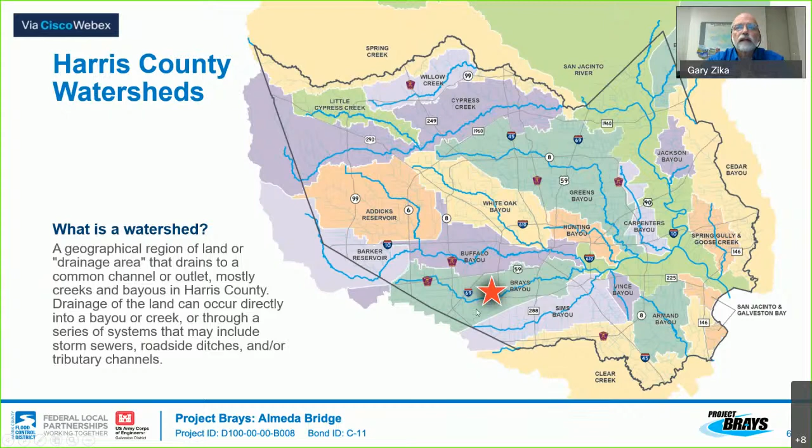Our area is prone to flooding. Here are the three main reasons: the area is prone to extreme rainfalls from tropical storms and hurricanes, we're flat with slow draining landscapes, and we have clay soils that do not soak up excess rainwater quickly.

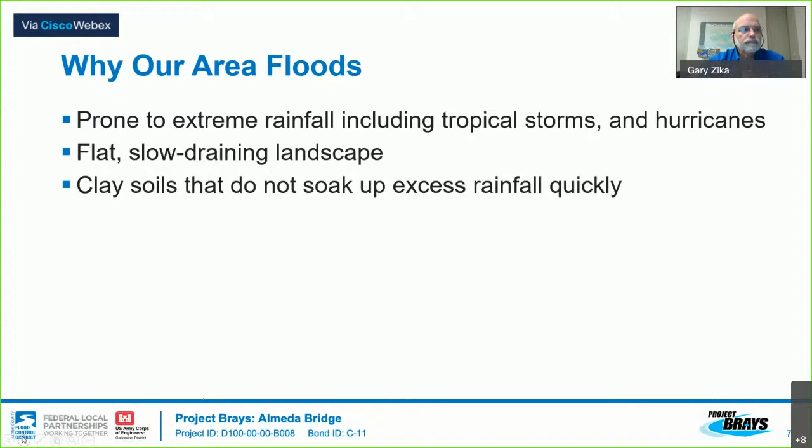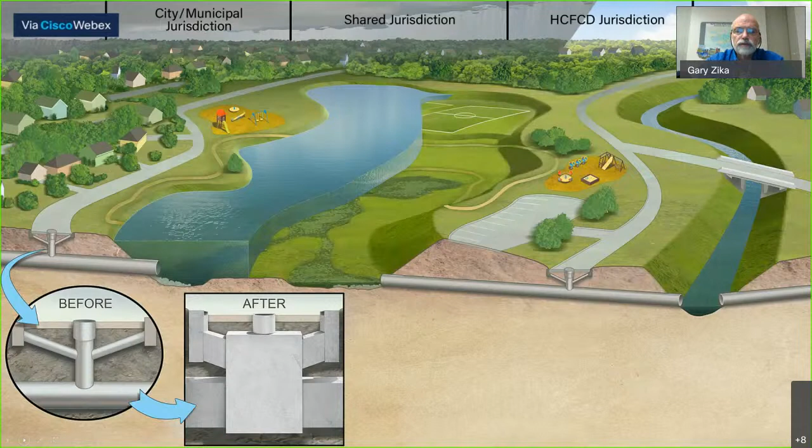On August 25th, 2018, Harris County voters approved $2.5 billion in bonds for flood risk reduction projects. This vote followed a series of meetings across Harris County in each watershed, which resulted in a list of what is now 181 bond projects. 149 of these 181 projects have been initiated so far.

A total of more than $680 million in partnership funding has been secured to stretch the 2018 bond program even further. The actual timing of each individual project will depend on a variety of factors, including environmental permitting, right-of-way acquisition, utility relocation, and in some cases, the requirements of a particular grant. That said, project lists and project schedules are updated regularly on our website.

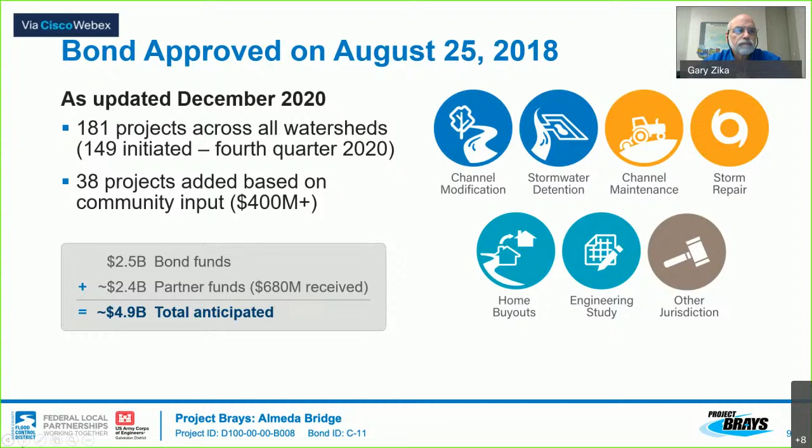We'll now move to the part of the program that's specifically about Brays Bayou Watershed and the Almeda Bridge project.

The Brays watershed is one of the most highly urbanized watersheds in Harris County. It covers more than 128 square miles and has a population exceeding 700,000 people. It's 31 miles long, making it one of the longest bayous in Harris County. The bayou begins at the mouth of the Houston Ship Channel and moves west to Highway 6. It touches on many different communities along the way, including the Texas Medical Center, Westbury, and Meyerland communities.

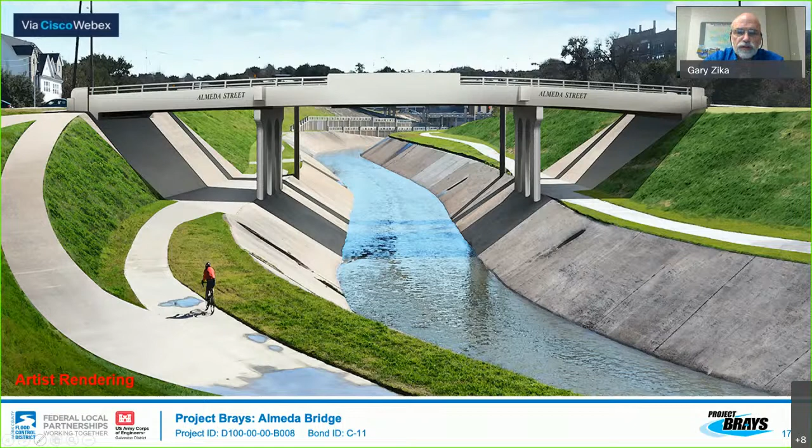As this artist rendering shows, the Almeda Bridge project will be demolished and replaced with a higher, longer, and wider bridge. This will increase the capacity of the channel, allowing more floodwaters to flow through Brays Bayou. The new bridge will have 5 lanes.

The new bridge will have 5 11-foot lanes, including a left turn lane, and expanded 10-foot sidewalks on both sides of the bridge. The construction cost estimate is approximately $7.6 million, with the City of Houston contributing towards the cost of the sidewalk enhancements.

As part of Project Brays, Harris County Flood Control District located, surveyed, and inventoried every tree along the bayou to determine its health and type. We've been using these surveys in our planning and design process to ensure preservation, moving, or replacement of existing trees.

As a result of our efforts, about 800 acres of green space will be created for residents and businesses in the Brays Bayou watershed. Another important program implemented by Harris County Flood Control District's Maintenance and Infrastructure Department is the Wildflower Program, which allows the district to plant native wildflowers along the bayou, increasing its beauty.

Keep in mind that in addition to the trees and shrubs, wildflowers will occur once the flood reduction portion of the Brays Bayou project is complete.

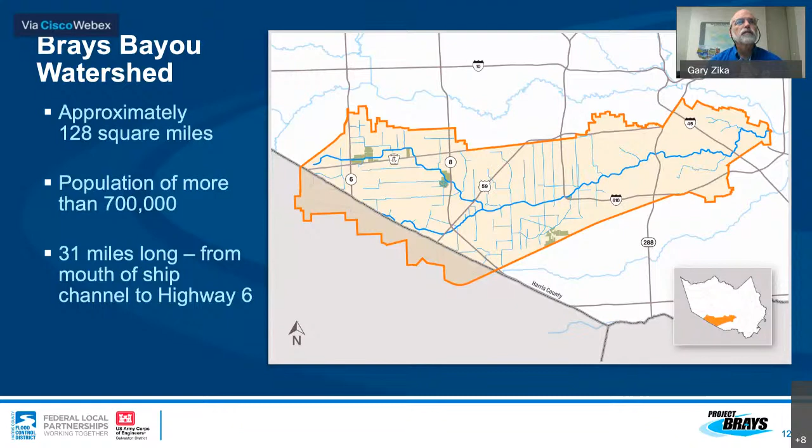It goes from the east end, past the University of Houston, through the medical center, Meyerland, and all the way out past the Westpark Tollway. It's got a population of 700,000 people.

And that 700,000 people really hasn't changed over the last 20 years. We're waiting for the latest census to see if that number has changed any.

Project Brays is a $480 million project. It's the largest flood damage reduction initiative ever done by Harris County Flood Control District. It's called a 211F, part of the Congressional Water Resource Development Act it was named under.

So Section 211F means that Harris County Flood Control can take the lead in terms of doing the design and managing the construction. We're reducing the risk of flooding to over 15,000 structures downstream of Beltway 8 along Brays Bayou.

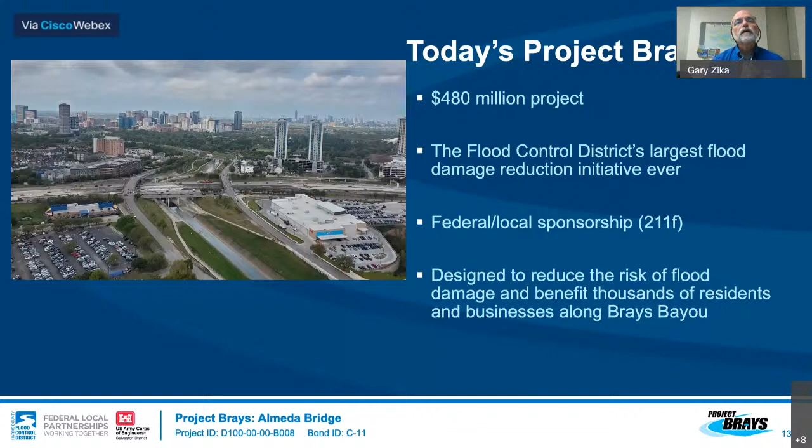We've got three main tools on Project Brays. We use stormwater detention basins to basically slow or store the water on a temporary basis, and that temporary basis is 24 to 48 hours. Those are on the upper ends of the watershed where it's more efficient just to store that water.

The channel modifications, we've got 21 miles. Most of that's on the downstream end where we go all the way from the Houston Ship Channel up to Fondren as the upper limits of the main channel widening. So we widen it and deepen it to increase the amount of water we can move down the channel. Those 21 miles of channel modifications lead to the third tool, which is the bridge modifications and replacements. We've got 32 bridges that we're either replacing, extending, or modifying.

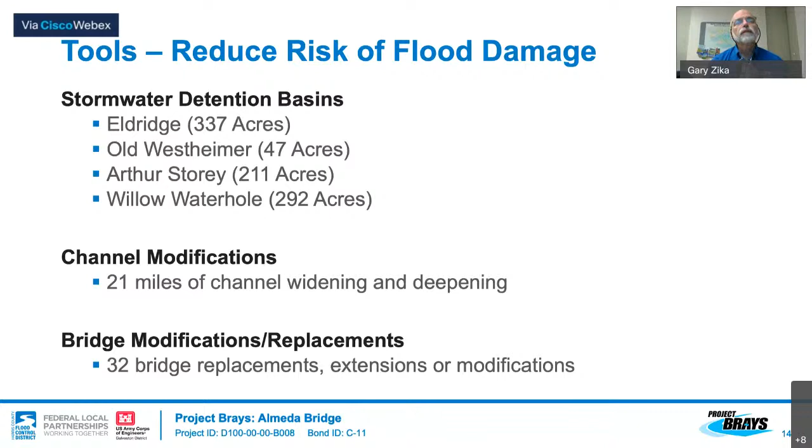All the channel work is basically done except at the 9 remaining bridges that we have left to do. Presently, Lawndale's under construction, Telephone's under construction. Hopefully about the same time Almeda kicks off, Calhoun will be getting kicked off. We've also got a railroad bridge we're extending down in Mason Park. And then Buffalo Speedway is the other bridge that was just recently closed to traffic, so it's under construction at this time too.

The bridge we're talking about tonight is the Almeda Bridge over Brays, which is just on the edge of Hermann Park, just west of 288.

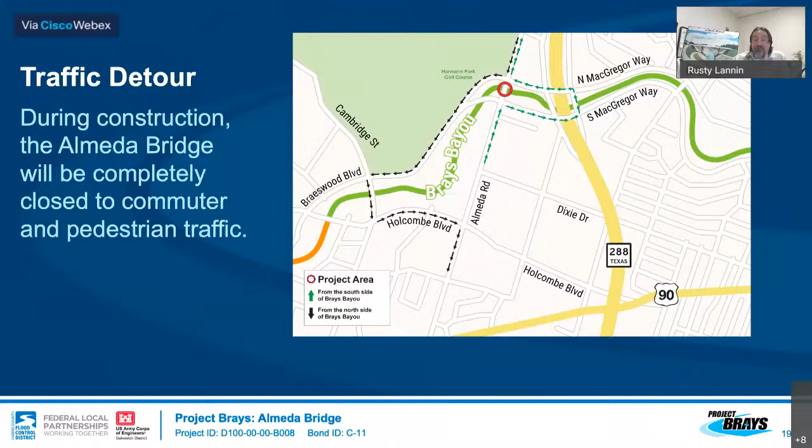The detours for the pedestrians have been in place along the trail for over a month now. We initiated the detour when Centerpoint Gas started doing work on the gas line, because you couldn't have people walking under where they're trying to put a gas line. So those detours have been in place for about a month, and they'll continue for the foreseeable future until the bridge is complete.

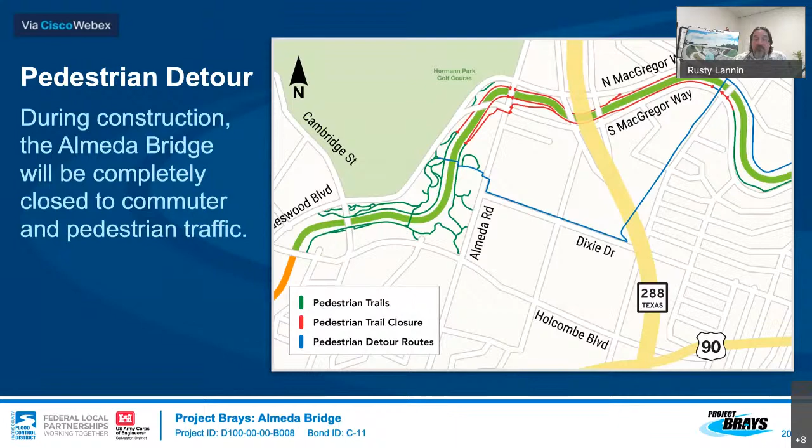Thank you, Rusty. Do we have an update on when Project Brays is going to be complete? We're shooting for the end of the year - the whole goal was the end of 2021. We might slip a few weeks here or there, but the goal is to finish by the end of the year. We have two more bridges following this one that have just been awarded to a contractor upstream, Chimney Rock and South Rice. Those two bridges will be under construction at the same time, where we're building a bridge in between the existing bridges.

Thank you, Rusty. For Gary - will traffic light timing on the 288 feeder be adjusted due to the bridge closure and detour?

We'll be taking a look at that. We can't change the timing - 288, I believe, TxDOT has control over those timers. City of Houston has control of the timers at the other lights, at Cambridge and other areas. Normally what happens is you put the detours in place, traffic tends to sort itself out over the first couple weeks, but they'll be watching, and if it's a real problem, they'll make changes. With COVID going on, traffic has been considerably lighter than any other time - our traffic counts are way down compared to what we had planned. So far, when we close these bridges, the traffic isn't nearly as bad as it could be.

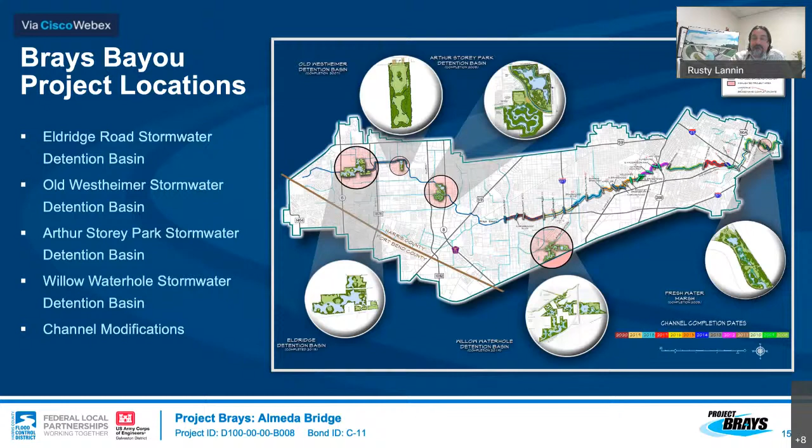All right, thank you, Rusty. And we have one more question about the construction schedule, so we'll hit that one more time, and I think that may be our last question. Construction is ongoing right now. The contractor's doing some prep work and getting things ready for the initial closure of the bridge, with the demo to follow shortly thereafter. We expect the closure to happen in the March timeframe. There's some utilities still being relocated that need to be completed before we can close and demo the bridge, and that should be in the March timeframe.

It'll be closed for approximately a year. They are trying to get everything wrapped up and finished before the end of the year, and that is our goal. It might take a few weeks longer, but that is what we're shooting for.